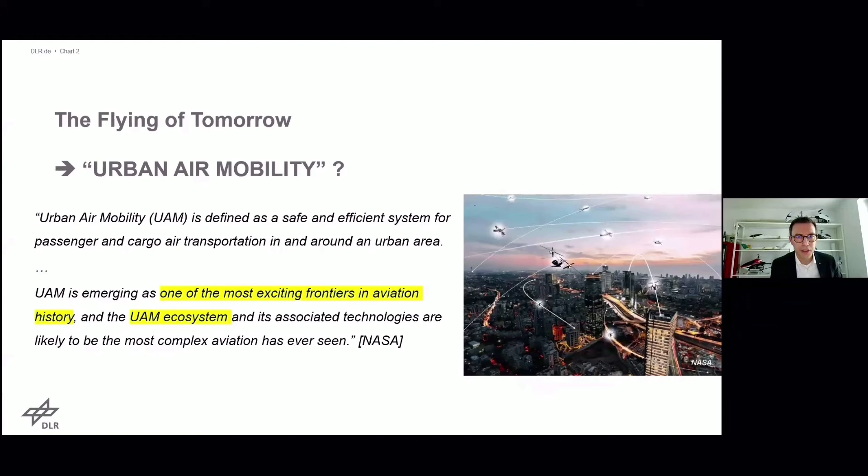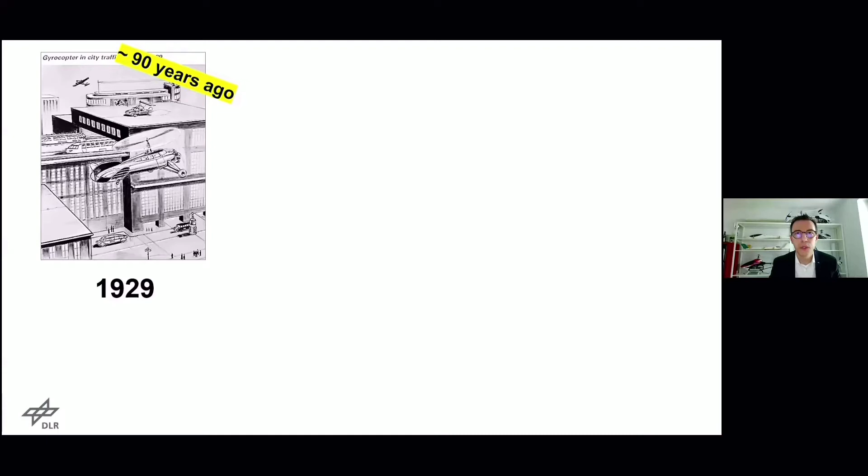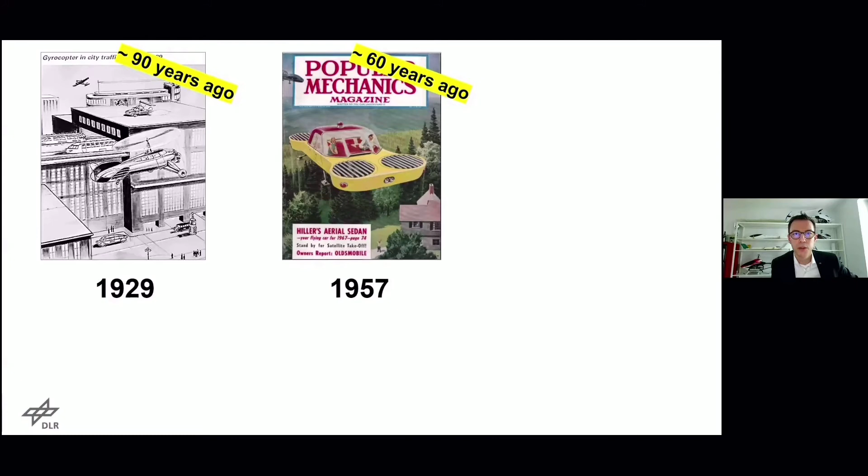But let's start a bit with the history. It's not really a new idea, because when we look back 90 years ago, we've seen the first drafts of mobility in cities with gyrocopters, directly connecting cars or road travel, railway travel, and flying. Then roughly 60 years ago, we had the first inventions of flying cars, looking like a standard sedan just with some fans. Even 30 years ago, we have something that might look quite similar to what we know today. And if we look at today, we can still find these types of vehicles everywhere.

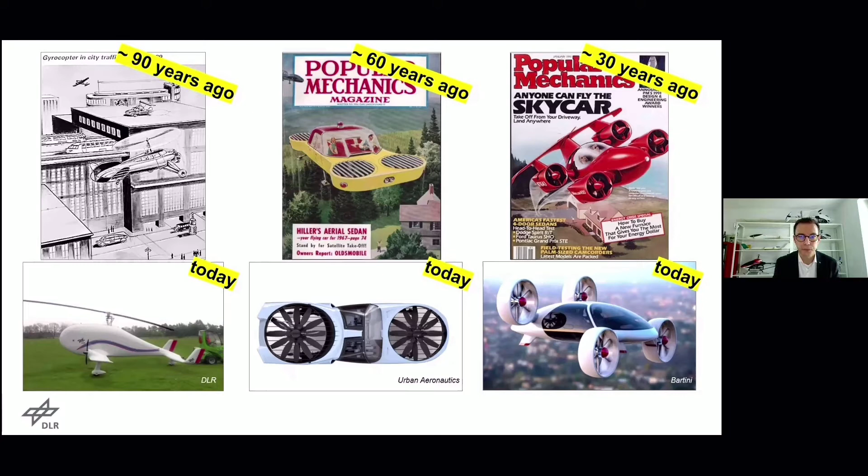So what is it that makes this so interesting? Why is it such a topic after 100 years already? What really is the motivation behind it, and why right now? First of all, right now it's feasible by the technology, which it was not during past decades, although we have seen some kind of urban air mobility with flying helicopters in several cities. But what is the motivation right now?

First of all, there's the economic view. In Germany, we just launched the Innovative Aviation Concepts action plan of the federal government, which is similar to the equivalent of K-UAM. Germany tries to tackle this topic of urban air mobility, to see what different applications exist and what the real benefit for our society is. So that's one hand, the economical scale in Germany itself.

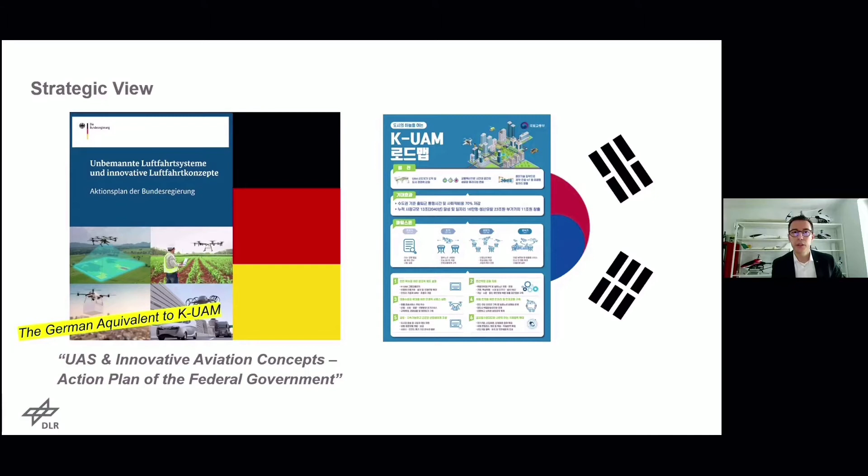But then, of course, a really major stepping stone, and a huge boundary condition, is the European Green Deal, where everything now has the number one priority to be circular and ecologically friendly, which means not only that the economy counts, but that with regard to climate change, everything is climate neutral. With regard to life cycle management, energy storage and usage, all of this has to fit into this new Green Deal on the European scale. So this was the strategic view of Germany and Europe.

If we go further into research, you might be aware of the Flight Path 2050 goals, which look ahead for decades into the future. Based on this, a committee built the Strategic Research and Innovation Agenda several years ago, which is regularly updated. It aims for 90% of travelers in Europe to be able to complete their journey door to door, from when they leave their house until they reach their goal, within 4 hours. Mobility has to change, because nowadays it takes way longer. Urban air mobility, in terms of connecting mobility modes and not only flying, is really an important point here.

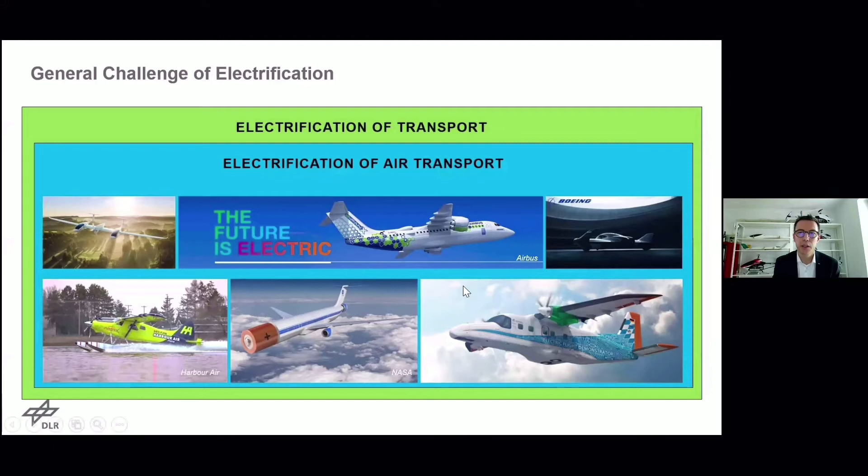And the electrification of air transport, from the research perspective, tackles everything from small UAS, the multicopters, which of course are already electric. But if you have a look at an A380 or A350, this size - we're not about to see this thing flying electric in the future, not even the longer future probably. So here's really to see how can we improve technology so that we have more electrified flying, and up to what category is it really possible to fly fully electric with sustainable energy sources.

And there, of course, urban air mobility is something where it becomes feasible, because there we have the category of small aircraft and UAS, which are definitely having an electric propulsion system, which can then be sustainable, where we are not limited due to the size or due to the weight to something where we need other propulsion means. So this is something where we can see, okay, the motivation is definitely realistic in terms of where we want to go.

But what does it mean in terms of technology? So what is needed here? And there, it's small aircraft. So what does it mean, small aircraft? Since decades, we have the general aviation sector. There are already small aircrafts, but urban air mobility with the Cessna is not that what everyone wants to do at the moment. And although this sector is the largest in terms of number of aircrafts worldwide, it's still not technically up to date. There are some light aircrafts which were built during the last years or decades, which received some updates, but we're not there yet.

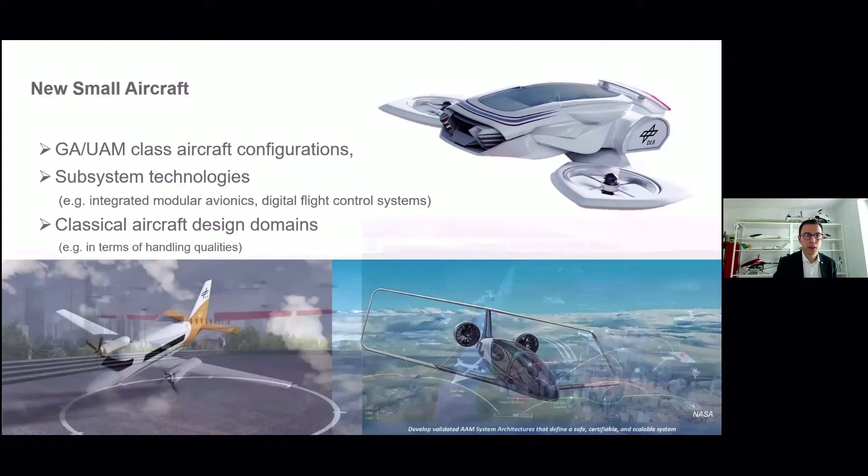Then, of course, we have new flight routes. The symposium is, of course, about urban air mobility, but this is quite a broad topic.

At the moment there are different definitions of these concepts. Even NASA talks about advanced air mobility, because it's not just limited to urban, to the mega city downtown. We also have inter-urban transportation, connecting smaller cities or metropolitan areas, and even regional travel, or thin haul routing, connecting suburbs and further regions. We just saw the Lilium presentation, where they want to fly about 200 to 300 kilometers.

That's not urban anymore, but still the idea of how we want to fly and what kind of vehicles we want to use. So the type of flying and the routes will definitely change, because at the moment we go to one airport, travel 50 or 70 kilometers there, fly a longer route to somewhere else outside the city, and then have to get back to the city by another transportation mode. So here we will definitely fly a bit differently.

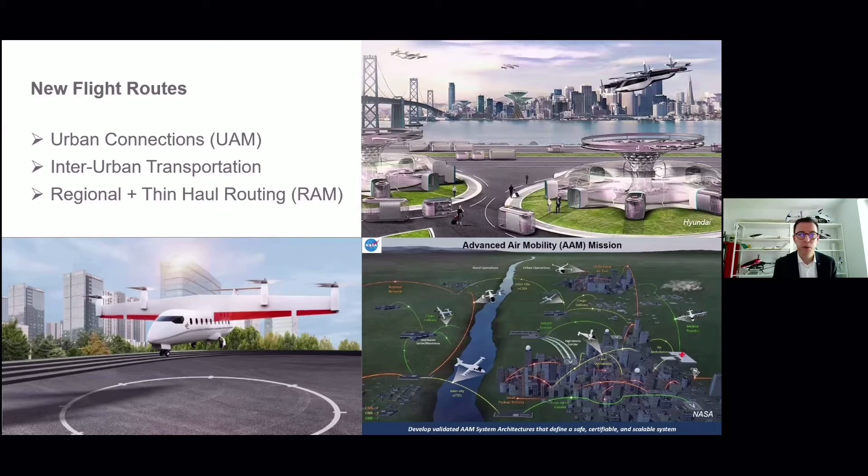Even as an example, Germany is quite a small country in size, but we have several hundred airfields, not all completely active, not international airports, but airfields that allow takeoff and landing for such small aircraft. If we look at this airfield infrastructure, it's possible to introduce this new mode, not only flying from places in a city or from an international airport we already know. There we already have an infrastructure.

So it's not only that vehicles fly from point A to point B in the future, which is different. It's also infrastructures - of course urban infrastructures, where we see concepts worldwide from Uber, from Volocopter, with vertiports, skyports, no matter how they call them. That's one option to do it that way. But I mentioned we have regional airfields worldwide, and every country has several of them.

That's also part of introducing a new transportation mode - it's not only that you land or take off there, because these new vehicles, if equipped with new electric motors, batteries, or even hydrogen, you of course have to provide that at these airfields. So the whole infrastructure, in terms of how airfields or airports have to look, has to provide these new energy sources. Whether it's a vertiport in the city, on the rooftop of a skyscraper, or at your airfield, they definitely need something to provide the energy.

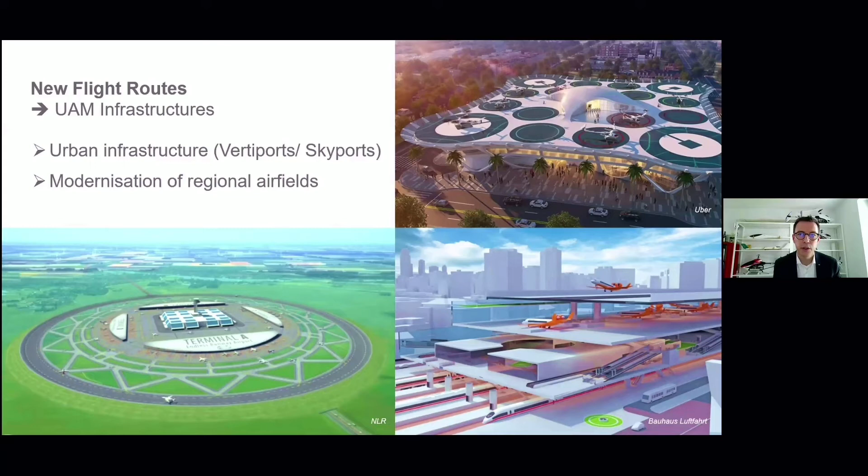This means you also have to look at the infrastructure from the research side - really how to provide this new environment which is necessary for UAM. And if you see the picture on the lower right, the aim is still to connect all these modes, to really fulfill the goal of stepping out of one vehicle and getting into the next, no matter what kind of transportation mode it is. That's really the perspective of how we have to completely change our environment with regard to the technology and technological needs of such a flying vehicle.

When it comes to autonomy, this is the fascinating part of UAM. In the next years we'll still see the vehicle flying with a pilot, but it's getting more and more automated, and the highest goal is still autonomy, where you don't even have to supervise it, or at most supervise it minimally. But to tackle the topic of autonomy, there are a lot of different aspects and categories.

Before, designing an aircraft was purely an aeronautical process. It's not anymore. Especially when we have a look at DLR, which has not only aeronautical research, but also space research, energy and transport research, and security. Everything is mixed now because you need the expertise of all these different research areas to really go for UAM as a whole, not only considering the vehicle, but the whole system.

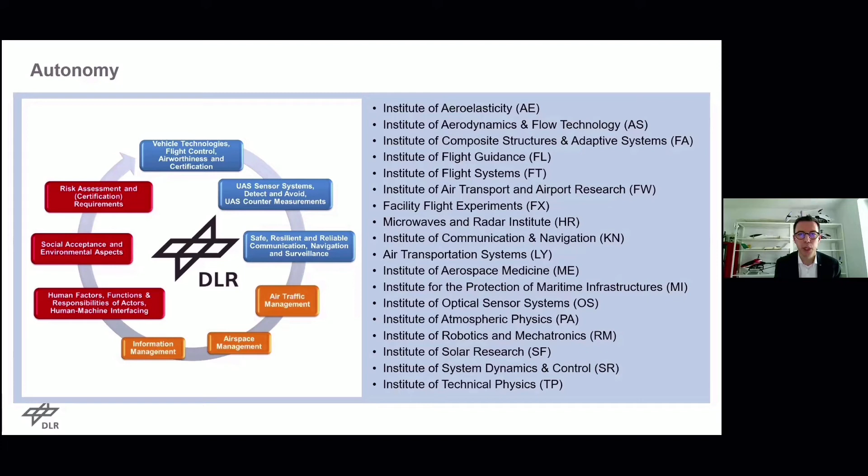And then, of course, sustainability. That is something we had in the motivation. What does it mean when it comes to technologies and research? Of course, we have already, by designing and producing the new vehicles, to think about how we maintain them, and also how to recycle them in the future.

So, of course, when you think about production, it's weight and cost reduction. This is essential for UAM in the future. If we want to sell the product, or provide a service, it has to be cost efficient. So weight and cost reduction is really essential here.

But at the same time, you have to meet the circular economy conditions, so that the whole thing, from the development and production process up to the recycling process, has to fulfill the sustainable conditions. And this makes it really hard in the future to see how to get along with this.

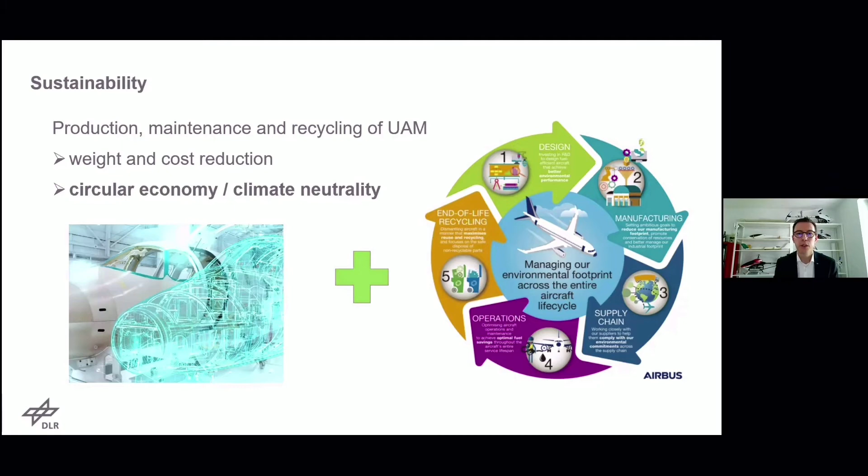So that's so far just as an overview of what does it mean. And the result is that we have UAM really as a holistic approach, that we have, of course, a new mobility mode, which needs new aircrafts, new flight routes, new infrastructures. But what makes it so charming is that it's a new ecosystem that will really transform our cities a lot, and especially that we have it as an autonomous ecosystem afterwards, which is at the same time a climate neutral application. So this is really the boundary conditions that we see so far for the topic.

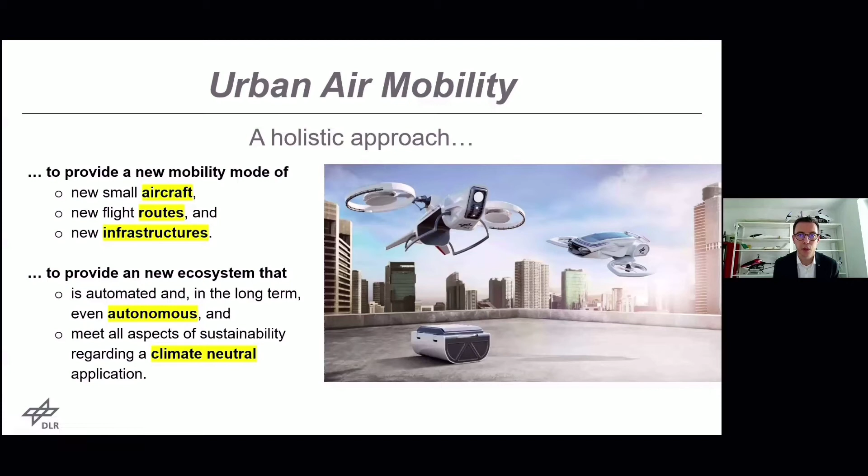So what does it mean for research? When we have a look at the European landscape at the moment, we just have a lot of topics. I described briefly what goes along with UAM, but let me just talk about these 4 topics and how Europe, or let's say the European research community, approaches this topic.

That means, of course, you need new sensors. You need to investigate how, for example, aspects such as artificial intelligence could help here. Neural networks that we will find already in several areas of flight guidance systems. And here, again, you have to have a look at the whole system: the vehicle, the UTM system, and the whole application. So there are, of course, different aspects of how it can look like.

So unmanned freight operation, where you have an A340 completely automated, or in the really low scale, smaller size class, where you have automated low altitude air delivery, which is then automatically routing through the landscape and avoiding areas completely by itself. So these are research projects that we conduct, also feasibility studies to see what is possible and then what can be used and adapted for UAM.

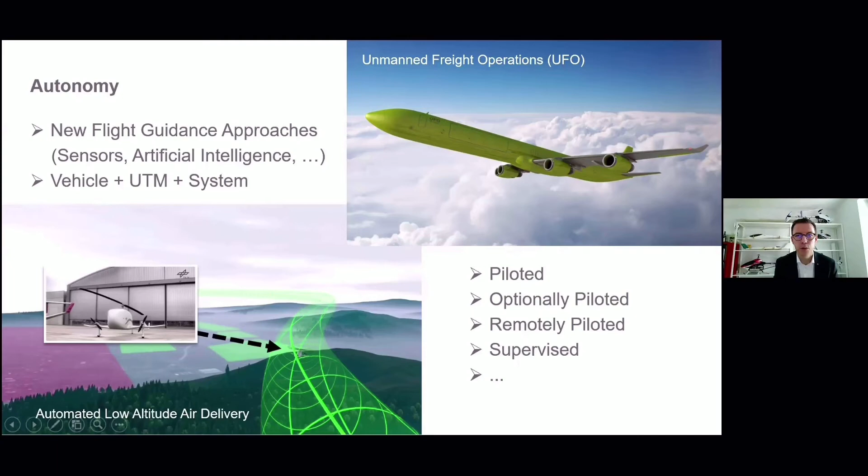Of course, urban airspace integration, one of these concepts that is completely necessary if you want to introduce UAM. And as any other, also at DLR, we have blueprints really to see how can you really create such new environments, new methods and tools to do it.

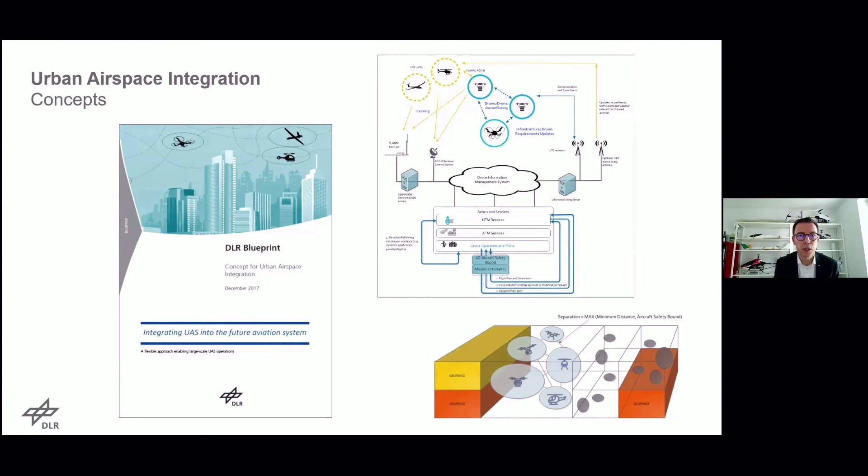But of course, it's not that you just write a concept and you do it on your own, not at all. We have seen that it's really more and more important that research connects with the regulatory side, so we are more and more closely interacting with the regulators. For example, since two years, we have now even closer cooperation with EASA, that we involve them in our development processes, because research, it's quite difficult or quite risky even, that you do your research, you have your projects, and at the very end, you see that in terms of certification and all the new regulations that we know, or let's say need for UAS and for UAM, that they don't comply with what your research has created. So there it really helps on the research side to get in contact, to integrate the regulators into your research.

And of course, on the European side, we have our national agencies for every country, but EASA is something that is really relevant for us. Just to have a look at it for UAM, or the urban airspace integration, as a small comparison of EASA and FAA, they have a lot of similarities, still something different, but that also is something we need standards for. If you want to fly outside your country, and UAM is such a topic, that's not something that you do on a national scale.

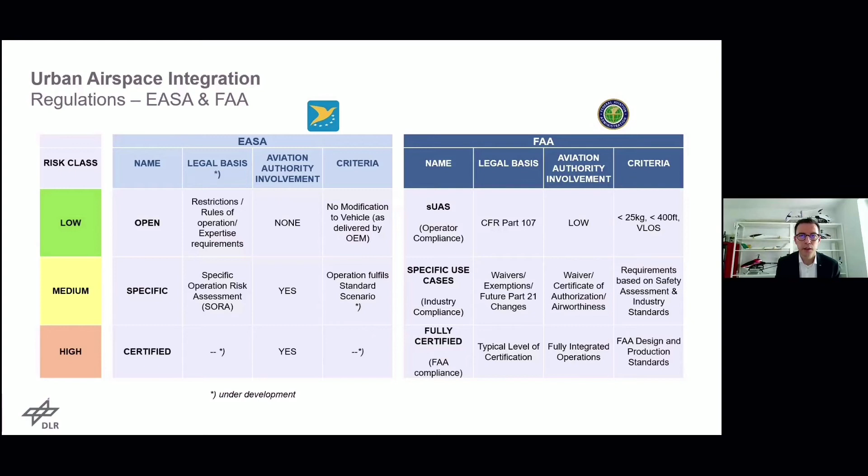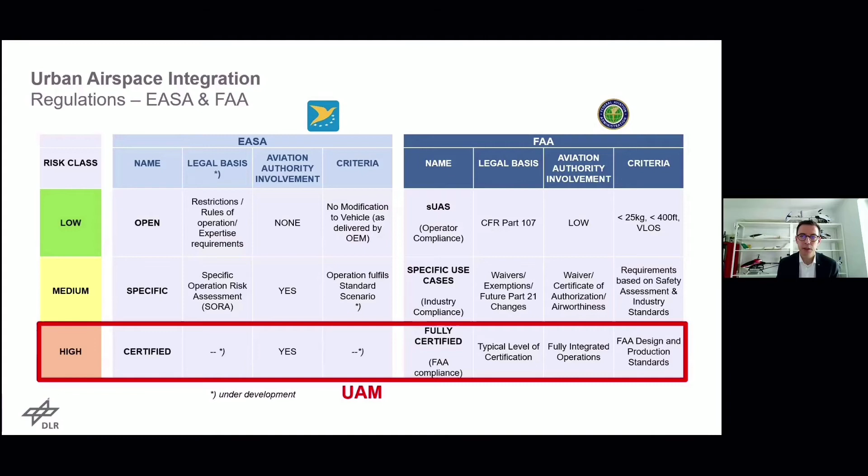So that is something where we need international standards, international consent of how this should look like. And of course, with regard to UAM, the certified category, that is what we are looking at here, transportation of persons from A to B, and that is still heavily under construction, while the other risk classes of open and specific categories for UAS, they are quite well defined already, and this is going, but for the certified class, it's still something to work on.

And if we have a look at EASA, for the next year, for 2021, they are planning finally the EASA regulations for the certified category, and at the moment they go for three operation types. So the first one is really something, as my previous example, so really having like a cargo drone, but even at the size of an A340, transporting cargo from, what is it here, Paris to New York. So this is for them operation type 1, just the simplest part.

Operations type 2, something cargo but smaller and used in urban environments. Operations type 3, something as Lilium will really have, the personal transport.

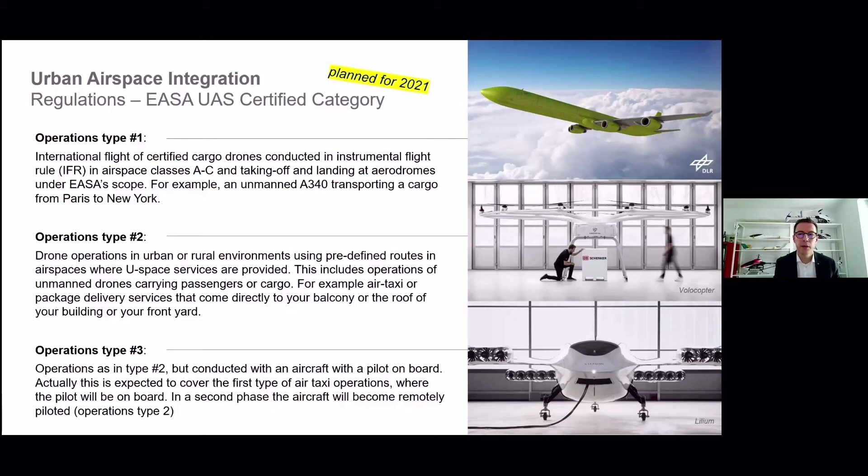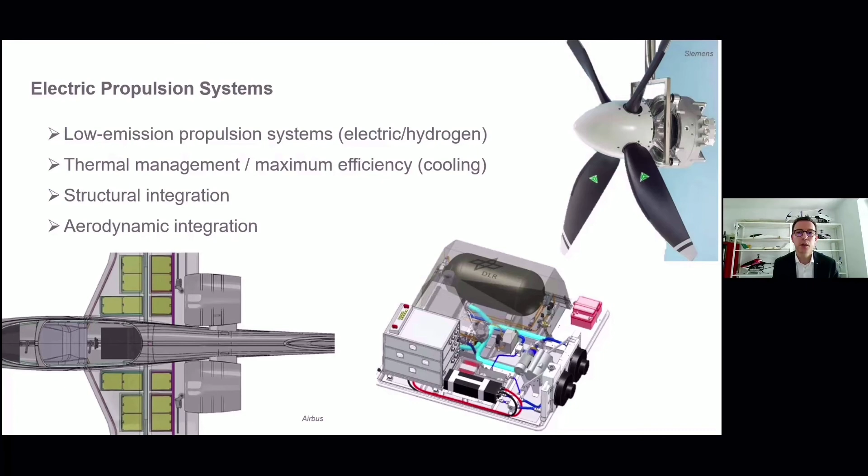Another topic, electric propulsion. This, of course, is of really high interest to see what is necessary and feasible here. And of course, electric and hydrogen power is what everyone is aiming for. But the problem is, with the small aircraft, the thermal management and the structure and aerodynamic integration - how you put all these systems that are necessary for electric sustainable flying, for automated flying, how can you put them in these small aircraft, especially if they should take off vertically, then you really have a small or limited amount of weight and structure integration area to do this. So this is really, really important.

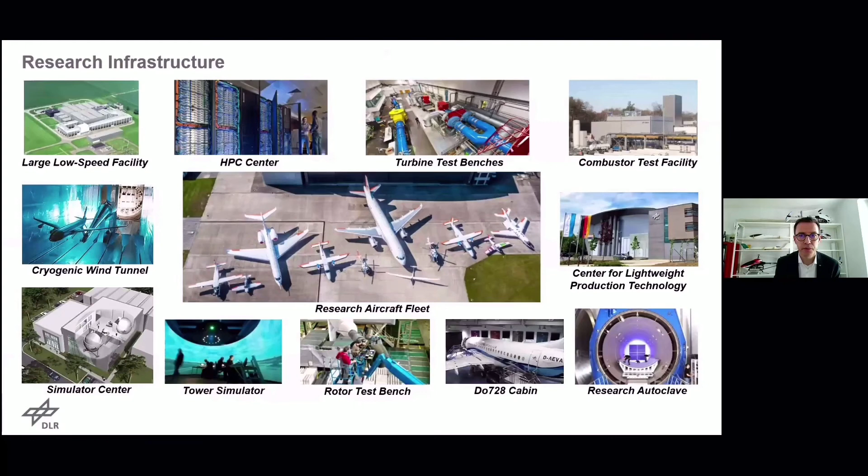Also, again, some DLR examples. There we are looking with regard to fuel cell development on every scale, so really from the small 45 kW fuel cell up to really 0.5 megawatt, where we can even have an engine for one of our 19-seaters. And so these technology demonstrators, this is something we are aiming for here. Infrastructure, of course, we have had a lot of infrastructure during the last decades, but what is really necessary here?

What kind of research infrastructure do you need for UAM, for the whole UAM research and development process? During several years, we had a European research project, RINGO, identification of aviation research infrastructures. One part has a focus on UAS and UAM.

We need to see on the European landscape, in every country, what is needed, what is there as infrastructure, what kind of infrastructure is really appropriate to use, which of them has to be modernized, and what kind of infrastructure has to be built completely new, which is not existent yet.

Based on this, we've seen that we need a lot of new UAS infrastructures. We do it in Germany together with other research and industrial partners, even with the government. We do it in Europe together with our European partners, and internationally, to see what kind of infrastructures are there within our partner organizations, how we can share these infrastructures, how we can learn from their experiences.

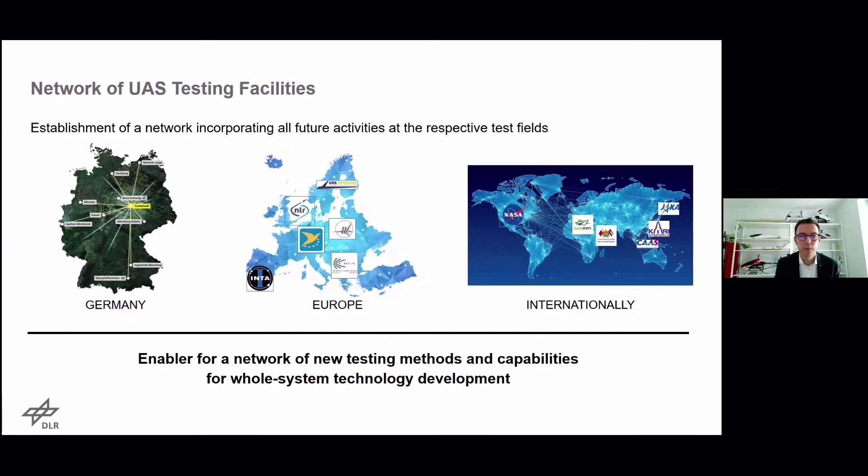One result was that Germany decided to have the National Test Center for UAS, an area where you especially can do high-risk campaigns and test all the different technologies. When it comes to an air taxi, you cannot just test it in your backyard. You need a segregated airspace, closed ground areas, where you are free to test everything you want. This airport was bought by DLR last year and is at the moment being modernized, so you have a proper basis in the future for the development and testing of everything that comes with urban air mobility.

There is really the technological demonstration to see, but also in Europe we have the conceptual demonstrations. So there are at the moment a lot of demonstrator projects, cities or regions that work together on the topic of urban air mobility, really to see how you can implement them in the future, in daily life, and what problems go along with what has to be done.

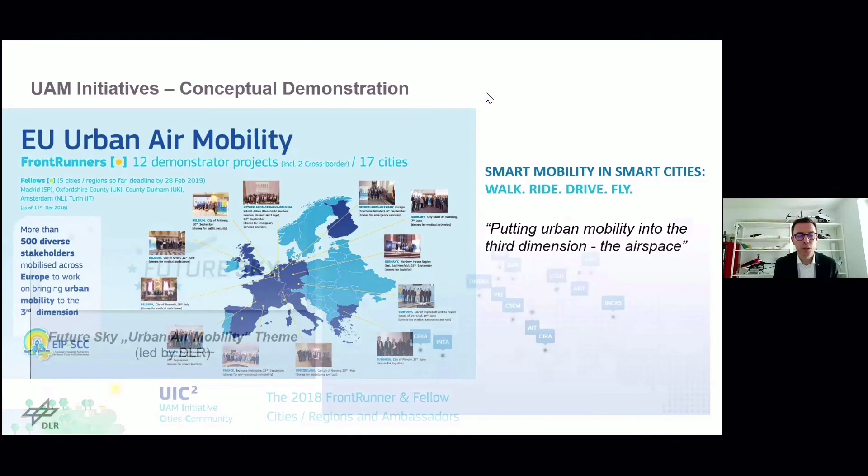On the research side, we do it with our counterparts - in Germany it's DLR, and in 13 other countries there are similar research entities. We coordinate urban air mobility on the European research level amongst all these partners. All these partners go for the same strategy - of course they have some individual strategies in their establishments, but in total we do the projects together and coordinate every activity. This is an activity led by DLR with a focus on urban air mobility for all these partners.

Of course, it's not only that we do it on a national scale or the European landscape, but we collaborate a lot with international partners, and we would be happy to cooperate with Korea. I would be happy to receive questions and hear from you. Thank you very much.